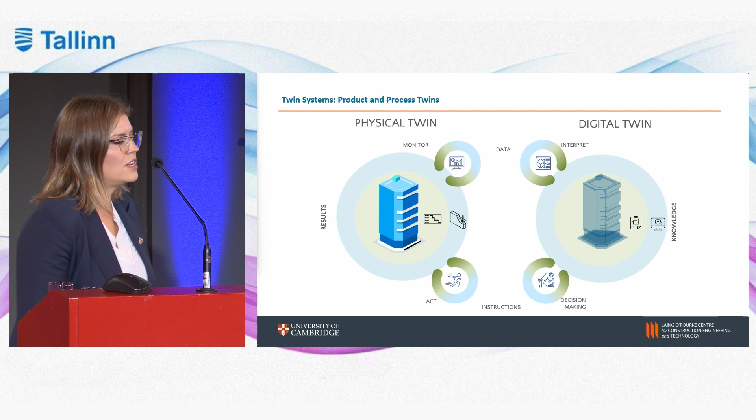This is our definition of a twin system, and the main difference here between just the concept of a digital twin is that we split this into 2 core domains, products and processes. This is a more flexible framework in our opinion, because you don't necessarily have to twin a physical asset on its own. It may be a twinning of a behavior, of an activity, a process on site. This is something to help us achieve digital twinning, not just of the physical assets themselves, but the processes that interrelate with it. So the critical component here is having a systems framework.

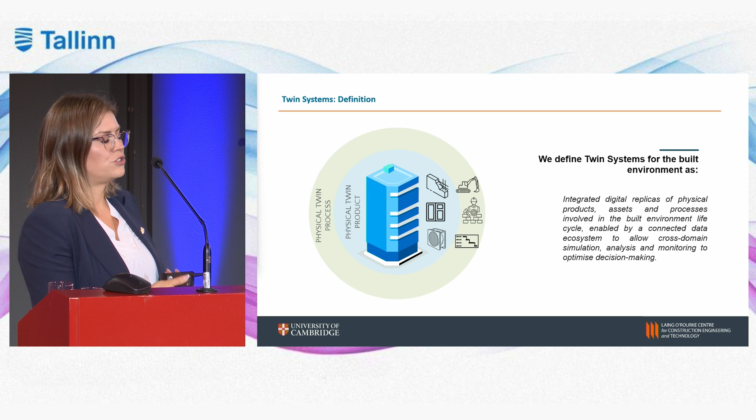The built environment is a system of systems, and so too will the digital twin eventually be a system of its own. And just like the previous speaker talked about the digital, the social, and the physical realms, well, the more we develop in these domains, the more we increase complexity. And to better understand their relationships, we adopt a systems approach to thinking about digital twins. As I mentioned, the twin systems is a more flexible way of defining or understanding simply what is a twin.

It's a more inclusive framework, we feel. And if you remember, much like how BIM was talked about in the past in terms of levels, we don't see that there's an equivalent with digital twins. We almost see that digital twins kind of begin already at the design stages and can be used at different life cycle stages of the development of that built asset.

So this is a visualization of the life cycle of the digital twin. At the top, you're seeing the physical twin products and processes over time. This is a very typical standard structure: the design, the construction phase, and then the operation phase. At the bottom, you see the counterpart of the digital twin product.

So the best analogy we come up with is actually similar to human development. If you think about the early design stages, this is where the digital twin starts to take form. This is sort of the birth of the digital twin. As you continue and move on towards the construction stages, you will again be incorporating construction phase related product data and process data. And as you mature towards adulthood, or when the asset is in operation, you are now combining multiple streams of product and process related data that relate to the digital twin.

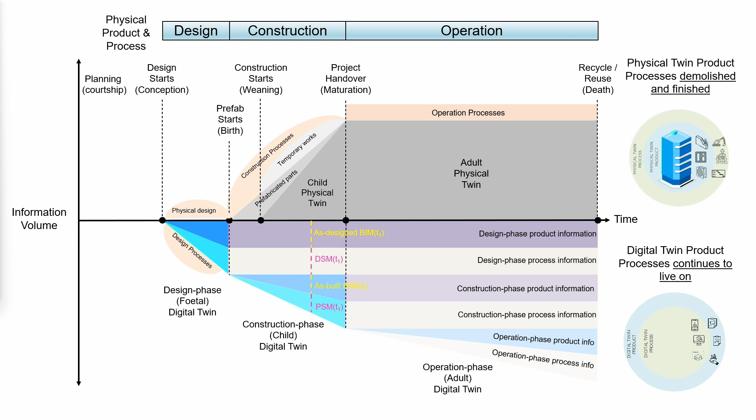But a digital twin representation of that asset doesn't necessarily die off. It is something that can continue to provide value and knowledge towards stakeholders, even after the project has come to an end or is being demolished. So that is a distinction between the digital twin lifecycle and the physical asset lifecycle. It's not necessarily linear in the same sense. It has an opportunity to be capitalized and utilized even after the asset is demolished and comes to its eventual end.

Within our CIT lab at the Civil Engineering Department, we have lots of researchers. We have over 50 researchers looking at digital twins across different life cycle stages. We have researchers focusing on mobile mapping, laser scanning, constructing the digital twin, and then designing the digital twin. The small group of researchers that I'm leading focus on digital twins at the operation stages, where we assume that a twin is already in existence. So we have various different areas that our researchers cover.

So Dr. Sun is looking at structural health monitoring or capturing of road conditions and digitally twinning the structural current condition. We have Dr. Hamid Reza, who's working on Project Omicron, which focuses on decision support systems, mainly for road maintenance. And we have Dr. Soheila. Her research work is actually part of my own research project, which is focusing on generative design tools that utilize digital twin data. So this is where we already assume we have a digital twin, and we can utilize some of that information into the next design of structural steel frame components.

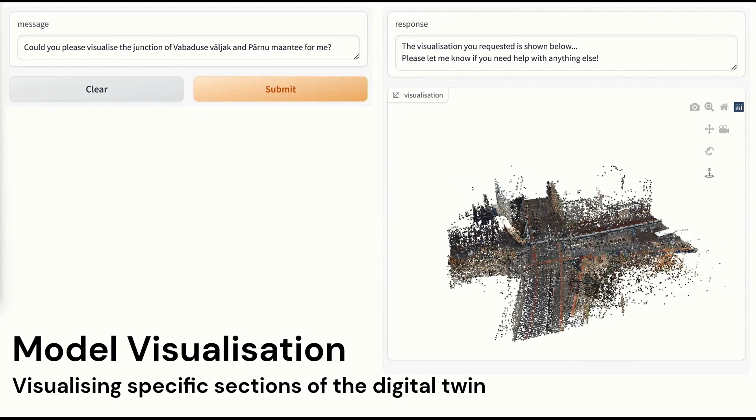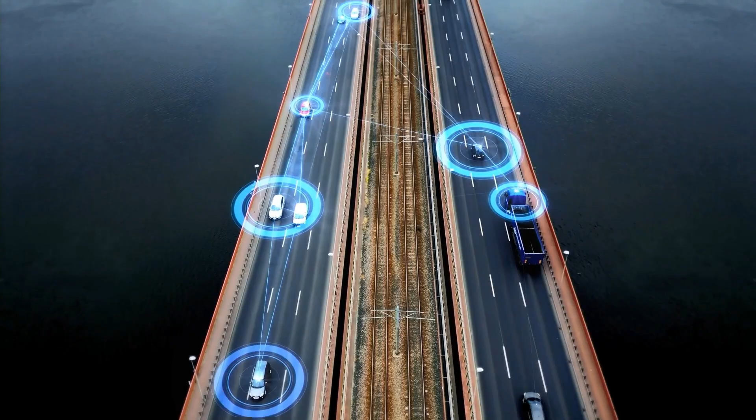Now, we have been using the OpenAI large language model, but we're actually training the model to understand multimodal feeds of data, so geometric and semantic data, as well as things like work schedule inquiries, or even helping us create revisions to the existing work schedules. So that's just one example of the type of research that we have been developing in terms of interaction with the digital twin itself.

Another area that Soheila is looking at is part of Project RESTOR. Now, the idea of Project RESTOR is actually to combine lab-based non-destructive testing of steel frame components and simulation data to create a catalog or a library of steel frame members that can then be used to generate new designs of industrial buildings. The idea is to actually be able to reuse structural steel components rather than go through the recycling process. So part and parcel of her work is the generative design element.

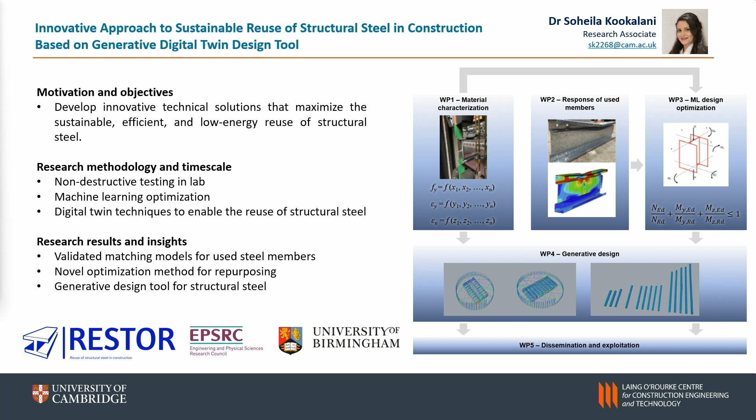So taking these existing steel frame members from a catalog and then assigning them to the new design, where we are reusing the steel frame rather than going through the recycling process. And this is a collaborative project with the University of Birmingham as well. It's gotten funding through EPSRC. It's about 1.3 million pounds of funding, and there's a collective team of us from both Cambridge and Birmingham.

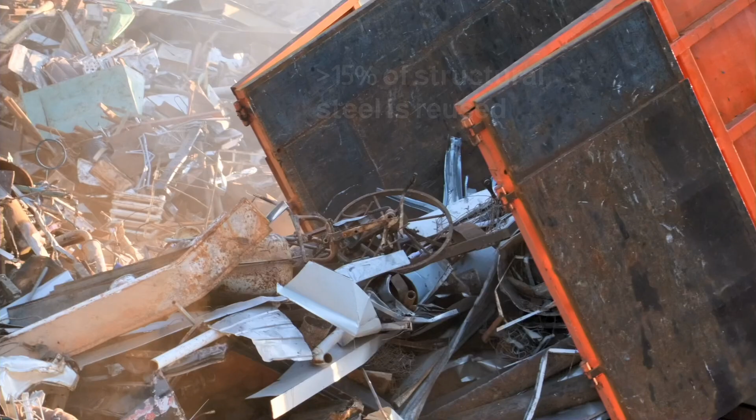So this will just do a quick demo as well of some of the generative design tools that she has developed so far. So as I mentioned, less than 15% of structural steel frames are reused. Most of it is recycled. So the premise of our work is actually enabling circular principles of reuse of steel frame components by combining simulation data and also non-destructive lab-based testing data.

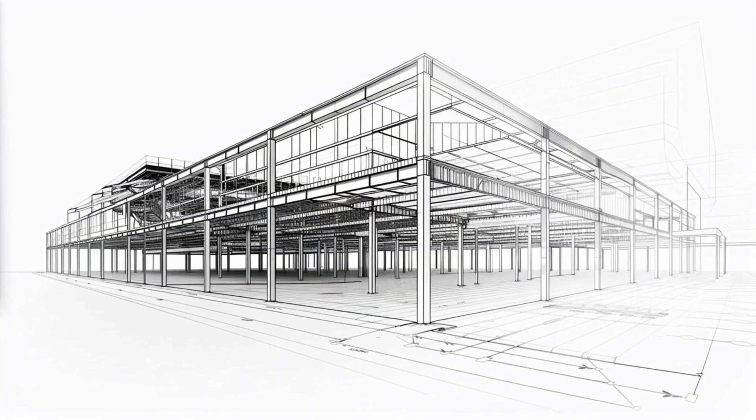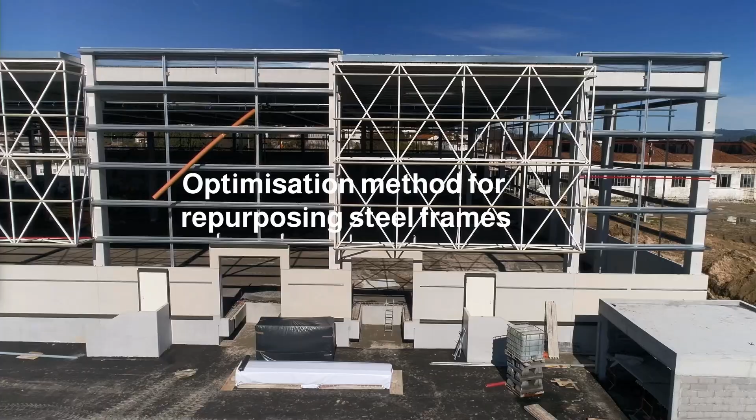This is then fed into a generative design tool for industrial building purposes, whereby we can potentially use these catalog steel frame members that will already have some essential information about the usability, the end of life cycle, whether it can be used on that particular revised design of an industrial building. Again, this type of research requires that there already is a digital twin, that you already understand the nature and the capacity of those steel frame members so that they can be incorporated into the next generation of industrial buildings.

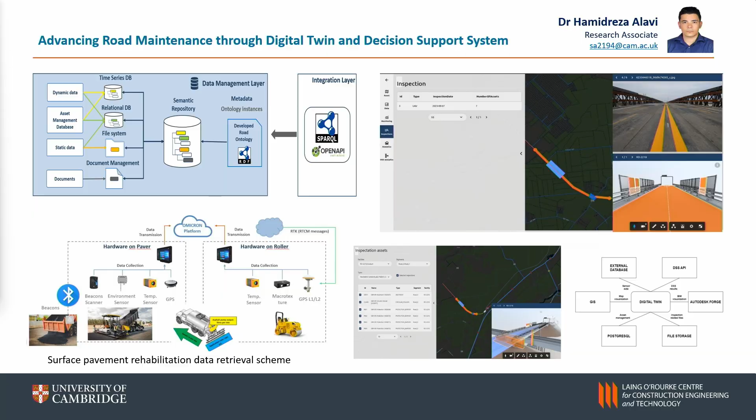And then Dr. Hamidreza is also looking at digital twins, although his work is more focused on roads maintenance capture data. So in this case, it's a combination of terrestrial and UAV data that is then combined to assess the road-based conditions. And Project Omicron is an EU-funded project. I think it's worth about 4.9 million. It's a collective research effort,

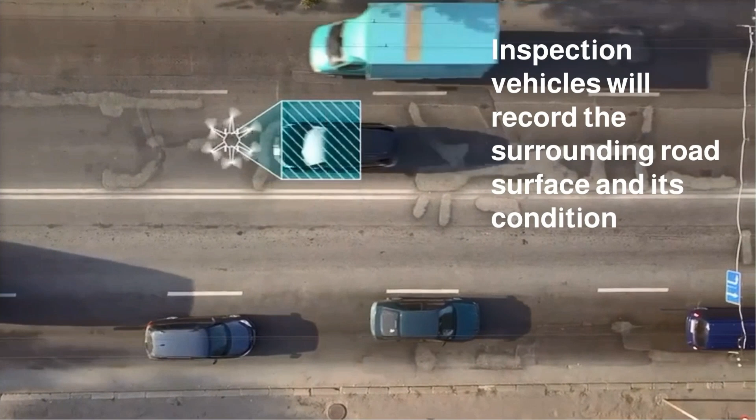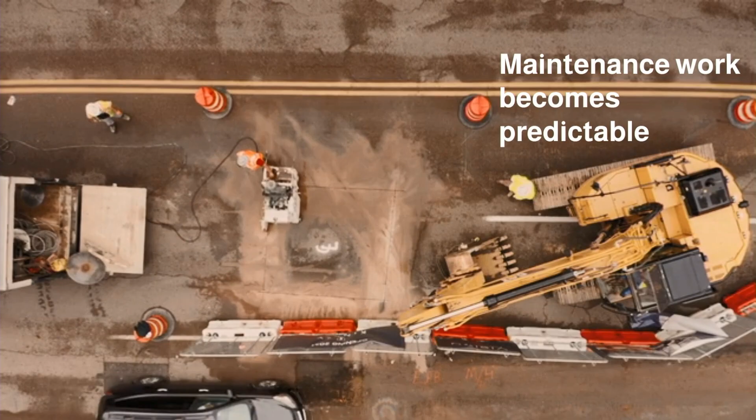but Dr. Hamidreza's focus area is on actually utilizing point cloud data to generate a more accurate representation of the road-based conditions. So it's a combination of inspection vehicles and LiDAR data, and part of the product that Cambridge is developing or co-developing here is a solution that we've previously developed called PointPix. And PointPix is a solution essentially to identify the conditions of the road based on point cloud data. So again, in this scenario, this is the use of digital twins for the purpose of maintenance of roads.

And much of our research really is focusing on digitally twinning our road infrastructure. And the point of Digital Roads of the Future at Cambridge is to help develop the infrastructure to be as smart as the vehicles that drive on it, because, as was mentioned this morning, in the UK we've all experienced disruptions within our roads. They would definitely benefit from having some sort of more accurate representation of maintenance of our existing road infrastructure to reduce traffic loads and other impacts on society.

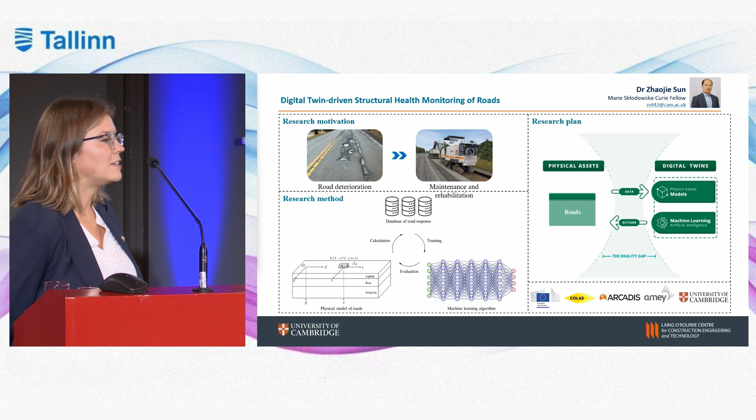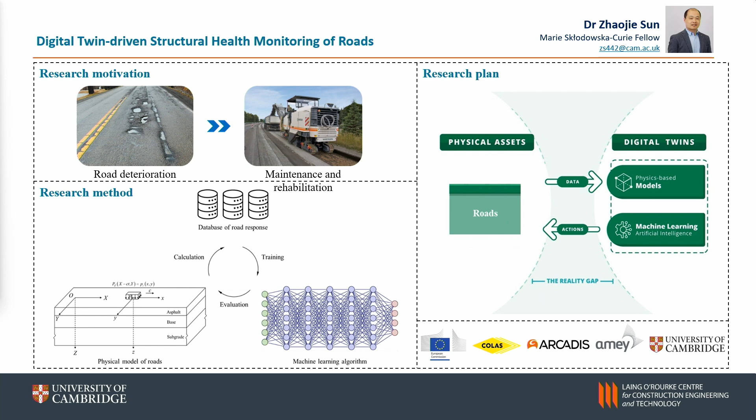Dr. Sun, his work is also focused on roads monitoring. His research work is actually more on the data science part, so it's more focused on creating more accurate representations of the structural degradation of the roads. So this is doing more physics-based modeling to assess or predict the conditions of the roads over time. As you are aware, in the UK, we have a very different climate to the Nordics and the Baltics, but nonetheless, it does degrade our roads over time, and it's something that needs to be monitored and improved in terms of our predictability on the conditions of roads.

So a key thing I want to summarize is that when I mentioned twin systems, the core concept really is to think about digital twins from a systems perspective, much like the built environment is composed of complex systems within the digital, the physical realm, and the social realm itself. And as we increase in complexity, it makes sense for us to think about digital twins and their life cycle. So when we implement digital twins, the value that is derived from them must also justify the cost.

And when we implement these digital twins, they will inevitably have their own life cycle as well that requires maintenance. That information needs to be updated, but our physical structures will age at a different rate to our digital information online. The sensors we embed in our road networks may quickly become outdated and need to be replaced, but we'll still have a track record of what was there and what were the key decisions that were taken throughout the development of those roads. So we are transforming the industry as a whole and the way in which the industry is thinking about value and deriving value from digital twins.

Another transformation that is required from the businesses and the industry side is also a transition in commercial models. The ability to actually share and disseminate data between different platforms is critical. We have a startup company that has spun out of Cambridge, which is trying to tackle this problem of translating different sources of data from digital twins. We all know that interoperability is a really challenging part of digital twins, but in order for value to be derived, different digital twins inevitably will have to be able to communicate with one another.